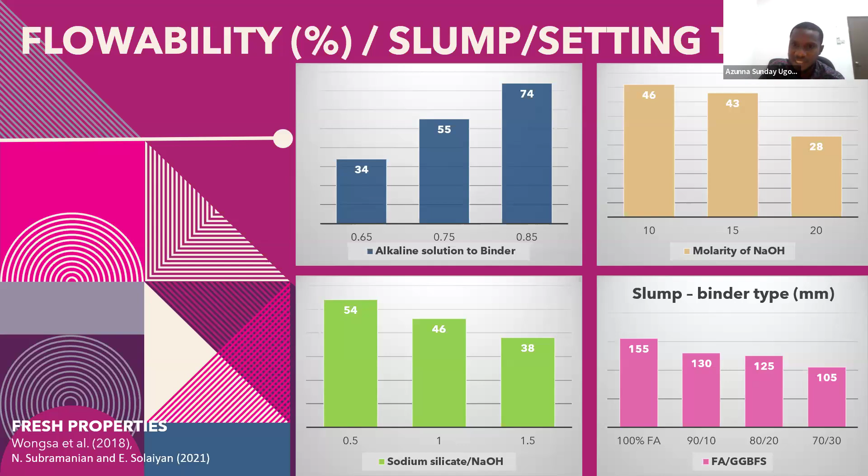So essentially, if we are designing a concrete with high workability, we have to use a high alkaline to binder ratio, a molarity that is not very high, and the ratio of sodium silicate to sodium hydroxide has to be low. Then we have to use a binder with less calcium oxide in it. Then I'll now go to the compressive strength and the factors that affect compressive strength.

Okay, now one of the major factors that affects compressive strength of concrete is the calcium silicate hydrate in that concrete. So what it means is you need a percentage of calcium in your binder, and you need a percentage of silicate also in your binder.

So if you look at it, most times, if you use only fly ash, because the calcium oxide in fly ash is very low, you're not likely to get a very high strength. At the same time, you can get a very high strength with GGBS if you use slag, because it has a high percentage of calcium oxide.

But it sets very fast, like I said. That's the negative part of GGBS. And the setting very fast also leads to flash setting. It causes your concrete to spoil in the long run. It's not very durable. So that is why GGBS is rarely used most of the time in geopolymer concrete.

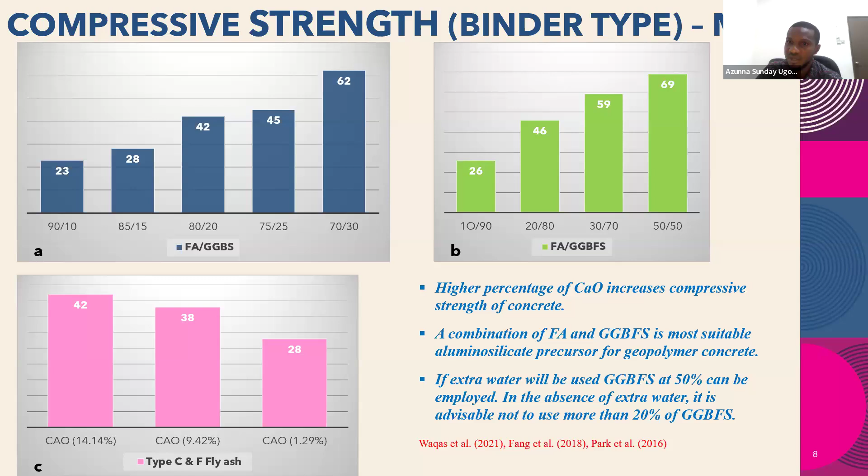Then the next thing that affects the compressive strength is the alkaline liquid to binder content. So like I said, it's like the water cement ratio in your normal cement.

So if you use a higher alkaline liquid to binder ratio, you're likely to get a lower strength, because what it means is your binder is less, you have a higher amount of alkaline solution. So the implication is geopolymerization will not take place very well. It will not be effective. You have a lot of water. Your mix may have a high workability, but your strength will be very low.

On the other hand, if you use a lower alkaline liquid to binder ratio, you're most likely to get a higher strength, because the binder content is going to be high. Then the alkaline liquid may not be as high as it would if the ratio is much higher, but you're going to get a very good strength, which is also the same for normal concrete. If you use say 0.35 or 0.4, you're in a better position to get a good strength.

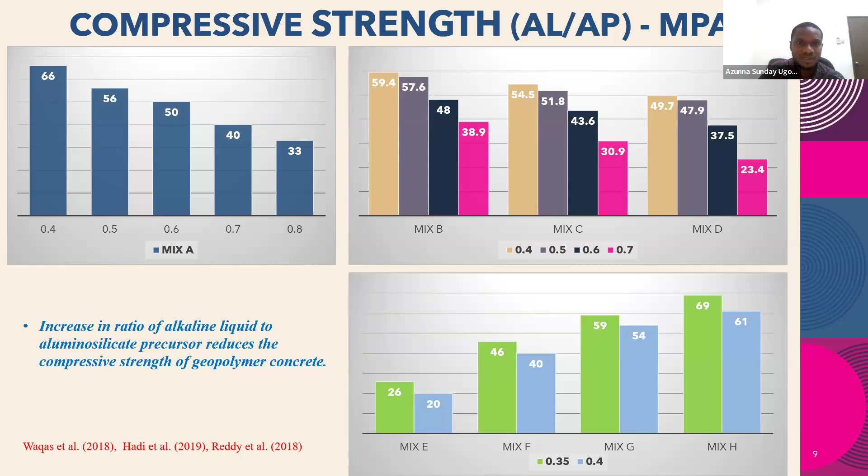That being said, another factor that affects the compressive strength is the ratio of the sodium silicate to the sodium hydroxide. I'm going to take some time to explain this a bit further.

So what it means is the sodium silicate is now too high, and the sodium hydroxide is very, very small. So what helps your concrete attain good strength is, one, the sodium hydroxide content in the geopolymer mix, and secondly, the calcium oxide and the silicon oxide in it.

So if you reduce the content of the sodium hydroxide too much, you're not going to get a very high strength, regardless of the binder content you used. Because the binder content is useless if the chemical composition is not broken down by the hydroxides. So the reaction between the sodium hydroxide and the chemical composition of your binder is what fosters your strength.

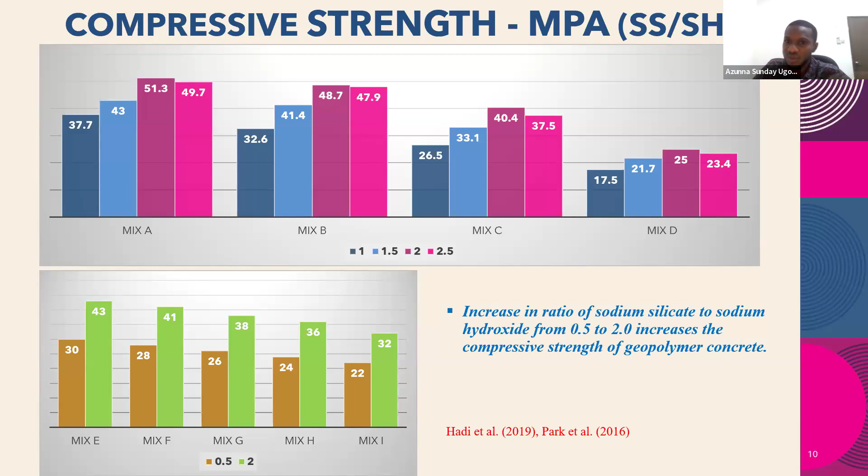So most times, there is what they call a trial mix in geopolymer concrete. You don't just pick one ratio and get what you want, you play around with it. But like I said, most times for the trial mix, they use a ratio of 1.5 to 2.5. You play around with that, and most times it gives you both good workability and good strength.

Then the molarity of the sodium hydroxide. If you look at all the mixes, mix A, mix B, and mix C, I said increase in molarity increases the strength because the sodium hydroxide content, if more concentrated, enables a higher and speedier reaction with your binders. So you're most likely to get higher concrete strength with higher geopolymerization.

So now there are factors that can affect the reduction in strength at higher molarity. One is the type of binder you are using and the binder content. If the calcium oxide is very high in your binder content and you use a very high molarity for your sodium hydroxide, you realize that the moment you add the alkaline liquids to your mix, because for geopolymer, normally you mix your fine aggregate, coarse aggregate, and your binders, the aluminosilicate precursors together first before you add the alkaline liquid.

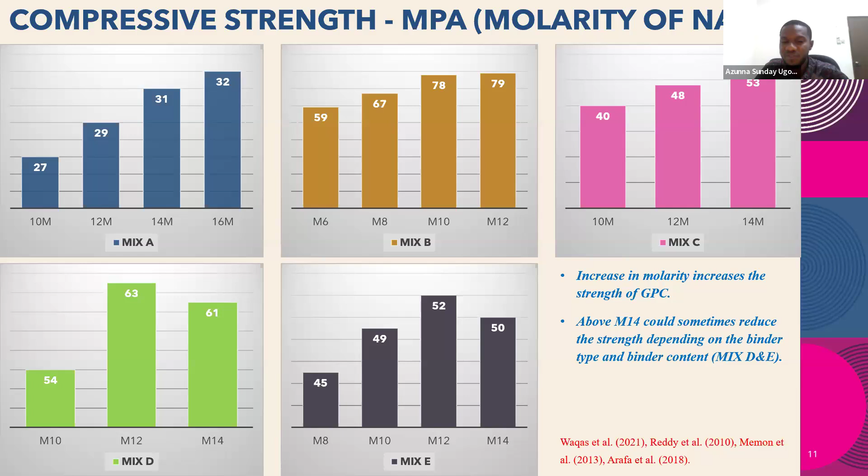So that is why in this situation, when you go too high, your strength is reduced—not because it didn't set fast, but because it set too fast, to the point you couldn't compact it. So you're not advised to use a molarity that is too high, and not advised to use one that is too low. That's why I said you can play within the range of 8 to 14 mole, which is quite okay to give the desired strength.

So now, if you try to summarize the material properties of geopolymer concrete, it's as if workability and compressive strength are inversely proportional to each other. For the first point, I said increase in alkaline liquid to aluminosilicate precursor ratio leads to increase in workability—if you increase the ratio, you have higher workability. However, if you increase the ratio, you're going to have lower compressive strength.

Then you go to the molarity. If you increase molarity, it reduces the workability of your geopolymer concrete. Then in the same vein, increase in molarity increases the compressive strength of your geopolymer concrete.

Then the second point, increase in the ratio of the sodium silicate ratio reduces workability. Now the inverse is the case, it increases your strength. Then a higher percentage of calcium oxide in your binders reduces your workability. In the same vein, a higher content of calcium oxide increases your compressive strength.

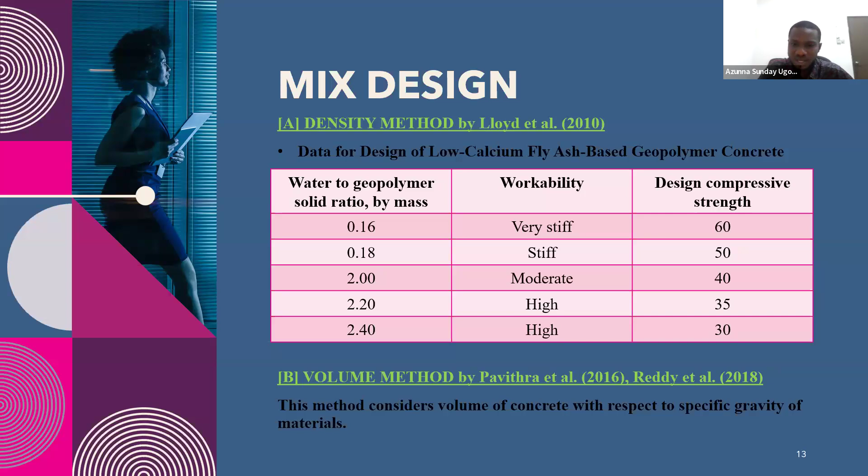Now, in the next page, I'm going to show you trials I did with both methods. So the first method, I used the density method by Lloyd et al. If you look at it, my alkaline activator solution ratio to aluminosilicate precursor, I used 0.35 all through. And my binder content wasn't so high, though it's supposed to give also a very good strength.

Then I'm going to be emphasizing on the slump, the setting time, and the strength. So if you look at the method, all the ratios, all the test results that I used the density method, there is no balance. Now, if you look at the first one, the first mix has a slump of 90 mm.

By the way, in my project I'm casting a column, so I needed a very high workability of more than 150. In the course of my trial mix, the slump was 90 and the strength was 20 MPa - very low. Then when I tried to increase the slump to 150, the strength went down again to 15 MPa, which is also very low.

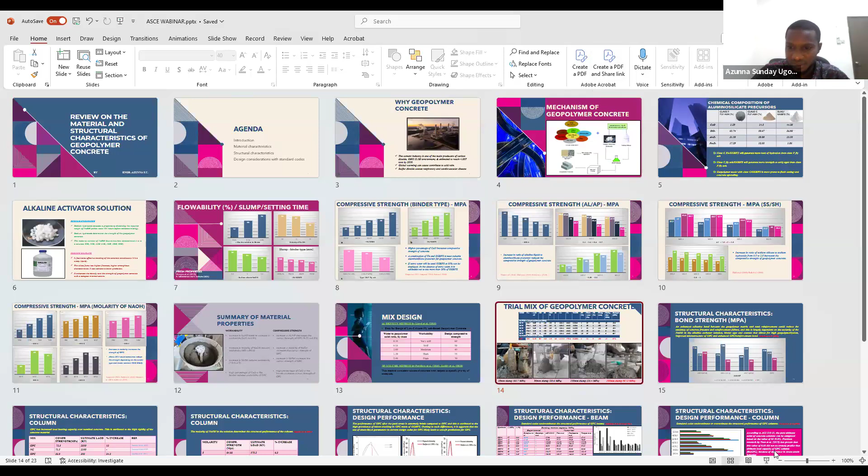On extra water - like I said earlier, the biggest problem of geopolymer concrete at the moment is not the mechanical properties, it's the workability and the setting time. Now if you look at the setting time for all my mixes, it's quite small compared to normal concrete.

Normally if you go through journals, looking at the parameters we discussed - binder content, the ratio of sodium silicate to sodium hydroxide, the molarity and all that - I never discussed extra water. If you read a lot of other journals, you see almost the same thing - they don't discuss extra water.

Now it is near almost impossible, or 99% impossible, to produce geopolymer concrete without extra water. I don't want to believe these literatures - they use the water and don't include it in the journals.

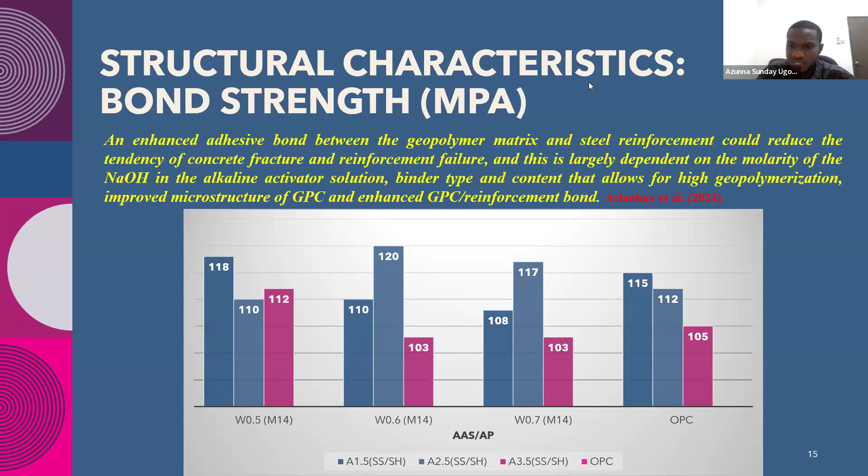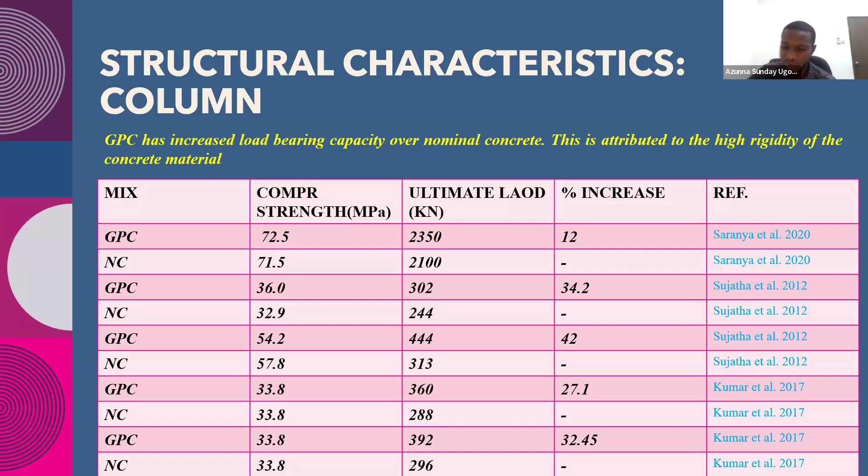Then another research was conducted by another person. Even the compressive strength for the second batch is higher than that of geopolymer concrete - normal concrete is 57.8 and geopolymer is 54.2, so the compressive strength is higher for normal concrete, but the performance under loading with geopolymer increased higher than that. So this tells us that axial load capacity can be taken advantage of by increasing the molarity, just like we saw in the beam.

So if you're designing any structural element, the molarity has to be a bit high. My advice here: normally if you use a molarity that is too high, your setting time is going to be less because the geopolymer reaction is going to be high. So my recommendation from experience is try to use a molarity that is high, even up to 16 if you can. For me now, I can even use up to 20 if I want, but that's because I'm a bit conversant with the design and how to play around the parameters.

Then in your binder, if possible, use 50-50% - 50% fly ash and 50% slag. Because what determines the strength of concrete, like I said, is the calcium silicate hydrate. So you need a high percentage of calcium, high percentage of silicate, and high sodium hydroxide in your concrete. Now, ordinarily, if you mix what I've just said, the setting time of your concrete is going to be very short.

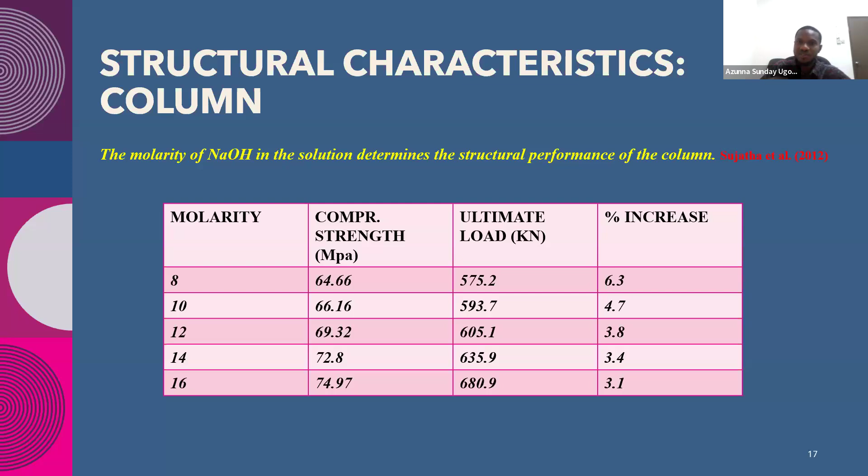So normally, for the extra water, you can begin from 5% of the binder content. From there, you increase it little by little. Then most likely, before you get to say 20%, you are guaranteed to get above 35 MPa. From my experience, you're guaranteed to get above 35 MPa, way higher than that actually. But I'm just saying 35, that's the least. It cannot go below that.

Then the next challenge in geopolymer concrete is the design of structural elements of geopolymer concrete. This is why we don't see geopolymer concrete everywhere. It's one of the reasons why for normal concrete, it has the standards. There's Eurocode, there's BS code, there's ASTM. We have so many codes that stipulate design standards, design formulas for normal concrete.

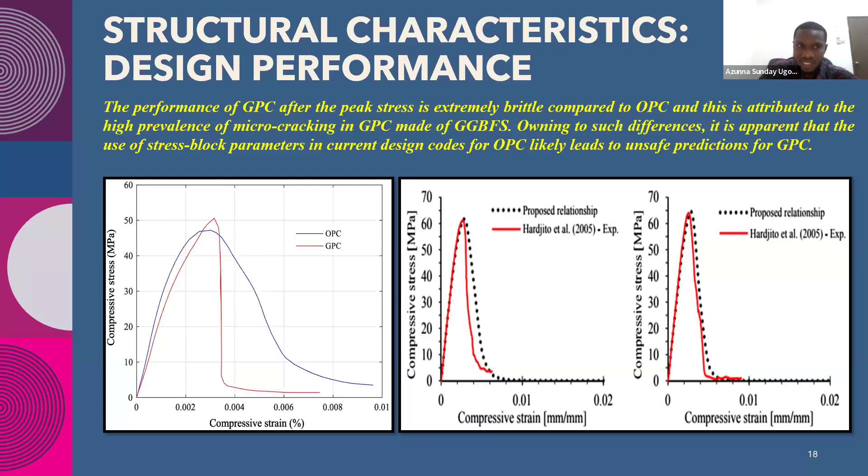Now, the implication of this is that most of these codes that were derived from normal concrete behavior don't seem to predict the behavior of geopolymer concrete very well. That's the implication of this behavior.

Now you can see that all of them under-designed the concrete. None of them was able to predict even the shear strength behavior of the beam. Now, this is going to be a problem because you cannot design something as a structural engineer and then you cannot go to sleep. You cannot ascertain if what you've designed can sufficiently carry the load imposed on it.

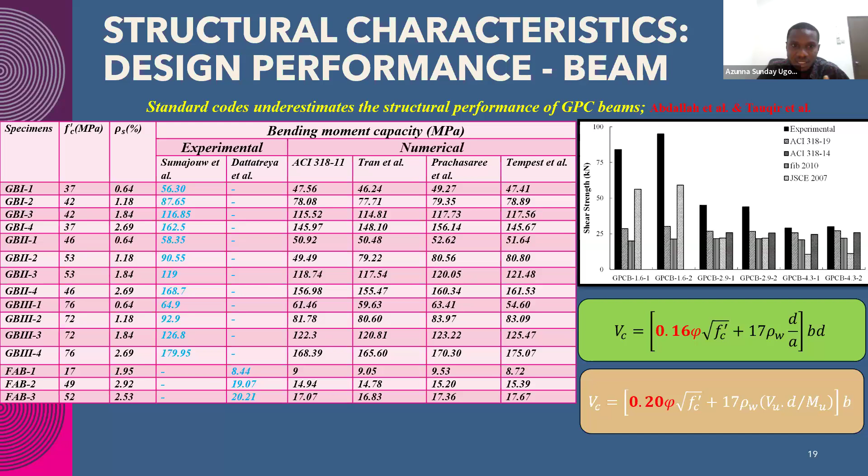So what it means is there's a lot of room for research in geopolymer concrete before it becomes a thing of reality, like we have normal concrete, before it becomes a standard, before it becomes acceptable globally. A lot of work has to be done, especially in the workability aspect and in the structural design category. This is another example for column design.

Column design also, the current factor of safety by ACI is 0.85, I think. But when you use 0.85 for geopolymer concrete, it still underestimated it. So I think in this case, they proposed reducing it. I can't remember. Virtually all the codes have issues in their predictions.

So another challenge is every geopolymer concrete has a different performance. I'm trying to summarize the general performance of geopolymer concrete. I can do a mix design in Malaysia and give you the same mix design, the same parameters and all that, for you to use in the US, and you get a different strength.

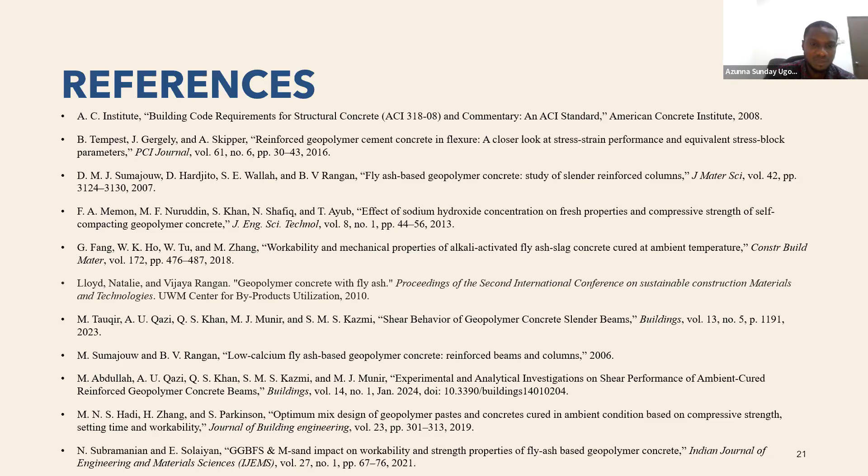So those are some of the challenges that geopolymer is facing at the moment, which is why it's not being accepted globally or internationally. That being said, these are some of the references. If you want to study more or read more on geopolymer, it will give you more insight on the parameters to use in the design, as well as the stipulations in the codes and all that.

So I think this is where I'm going to wrap it up.